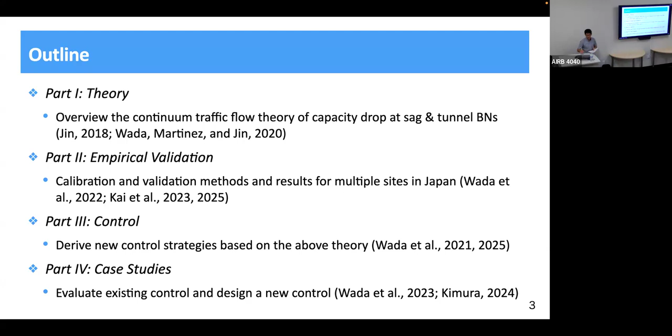Let me explain briefly why sag and tunnel. There are two main reasons. The first is that they are very common bottlenecks in Japan, because most intercity expressways in Japan pass through mountainous areas. About 80% of traffic congestion occurs at uphill sections and tunnel entrances.

The second reason is the long research tradition starting from the works of Professor Koshi's group. This includes key findings based on advanced observation, the development of sophisticated simulation, and many empirical results. Let me show some advanced observations.

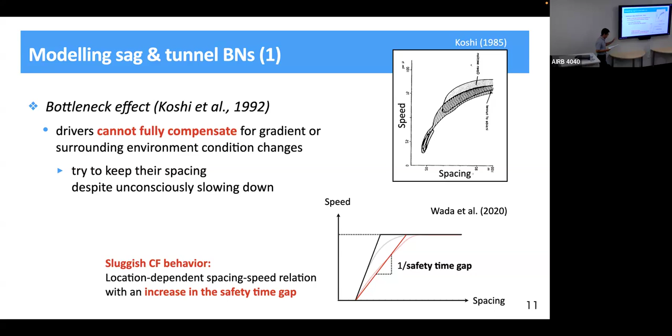What is CF again? Oh, this is sluggish car-following behavior - car following behavior. And this is the sluggish car-following behavior at sag and tunnel bottlenecks.

Let us look at the relation between the spatial change in traffic capacity and the safety time gap. Since the reciprocal of the safety time gap is the y-intercept of the flow-density plane, an increase in the safety time gap around the bottleneck section leads to a spatial reduction of traffic capacity, as shown in this upper figure.

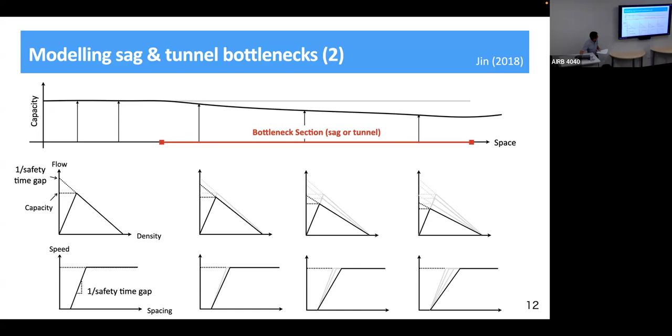This is a simple explanation of why the sag tunnel becomes a bottleneck - this is the bottleneck mechanism at sag tunnels.

Now let us illustrate the mechanism of capacity drop, showing how an increase in the safety time gap can also serve as a primary factor in capacity drop. That is, a temporal reduction in traffic capacity, not a spatial reduction.

However, in sag and tunnel sections, the trajectory becomes like this due to an increase in the safety time gap inside the bottleneck section. The headway here is the reciprocal of bottleneck capacity.

The important insight from this trajectory is that the increase in safety time gap describes not only the local capacity reduction explained in the last pages, but also delayed speed adaptation to the lead vehicle in the car-following situation, like this.

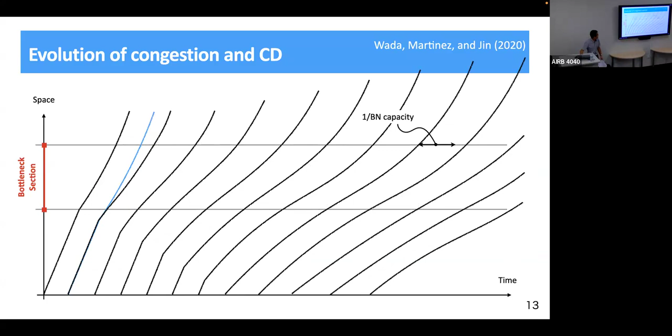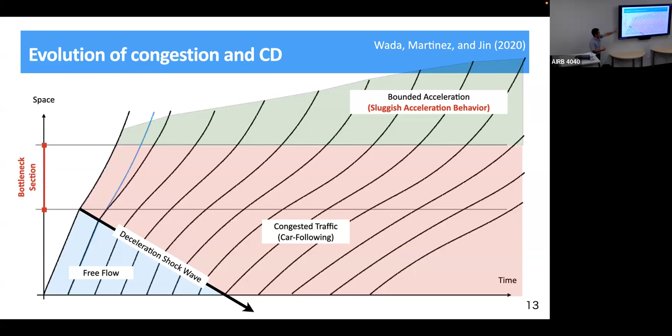This is a traffic state around the bottleneck: free flow, congested traffic, and bounded acceleration. Bounded acceleration state means that the driver cannot recognize the head of queue immediately, a kind of sluggish acceleration behavior. So bounded acceleration happens after people get out of the bottleneck. But for certain tunnel bottlenecks, there is no clear change in road condition, so people may not understand that they have passed the bottleneck. This corresponds to the bounded acceleration state.

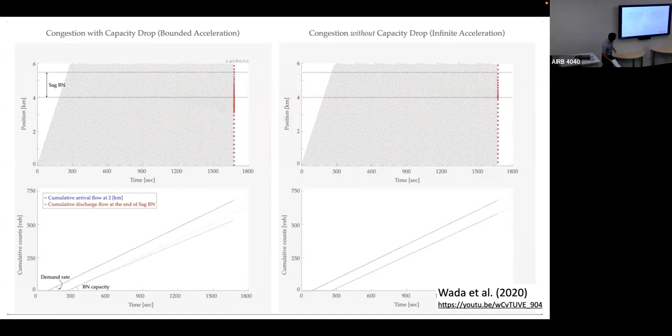So finally, in the last part of the theory, let us look at the shape of the speed recovery profile in capacity drop stationary state. In congestion, the flow upstream and downstream are all equal to the queue discharge flow rate, and this value is smaller than bottleneck capacity. This can be shown at this dashed line level, and the same flow rate can be represented in the speed-spacing plane by a dashed line from the origin like this, and this is the flow rate.

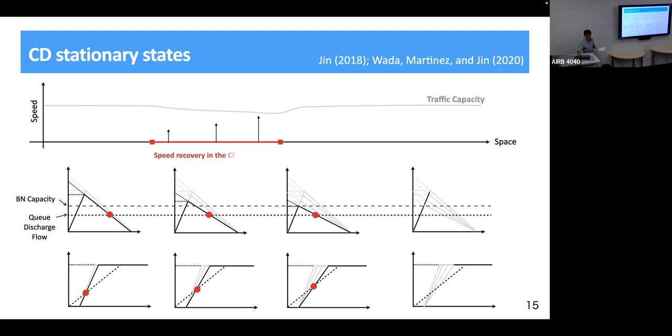By examining the traffic state at each location, represented by the intersection between this dashed line and the fundamental diagram, we can see the speed recovery inside the bottleneck section. Actually, speed increases inside the bottleneck section. On the other hand, downstream of the bottleneck, the transition from congested flow to free flow caused by bounded acceleration is observed, represented inside the fundamental diagram, finally reaching the free flow state.

This is a typical shape of the speed recovery profile observed in real traffic. The recovery in the bounded acceleration state is a driver's isolated acceleration. In this case, the higher the speed, the smaller the acceleration, meaning the profile shows a concave shape, approaching free flow speed asymptotically. On the other hand, speed recovery in the congested, car-following state often shows a clearly unnatural convex shape from the viewpoint of isolated bounded acceleration. So this may be the influence of the bottleneck appearing in the speed recovery profile.

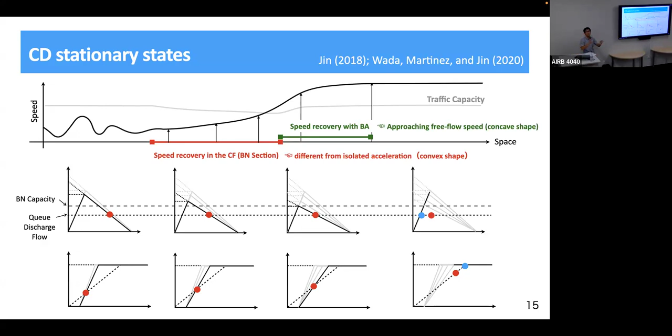Okay, this is a concave shape and this is a convex shape, there are two different states. In math terminology we can say concave down, concave up. I know some people use convex in this sense. What do you think? Concave, yeah.

The discussion on the previous page shows that the head of queue, the point where the state transitions from the congested state to the bounded acceleration state, is the inflection point of the speed recovery profile. But many people may think that the start of the speed recovery is at the head of queue, right? This comes from implicitly thinking of the bottleneck as a point. However, if we consider the bottleneck as a section, it is more natural to think of the inflection point as the head of queue. This is a very important insight from this theory.

We will see this in this graph. First, let us consider the case of a point bottleneck. In this case, as we can see from the speed recovery profile below, the start of speed recovery is indeed the head of queue. But such rapid speed recovery is not observed in usual sag and tunnel bottlenecks. A typical situation where such a point bottleneck can be seen is congestion caused by an accident or a traffic signal intersection.

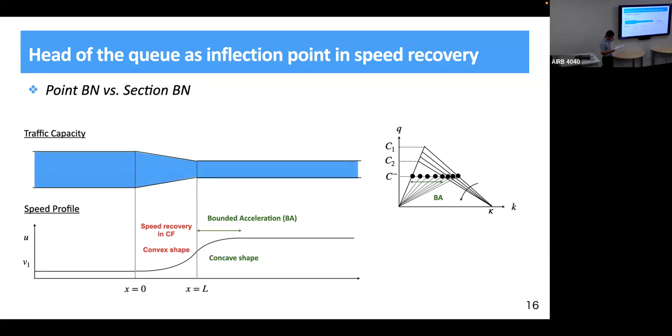This is the same graph as on the previous page. When a capacity drop occurs, the flow rate is less than the bottleneck capacity, so we get the car-following state, bounded acceleration state inside the fundamental diagram, and free flow state. It's natural to think of this inflection point as the head of the queue. This relationship between the bottleneck structure and the capacity of a stationary state becomes very important in empirical analysis and practical application.

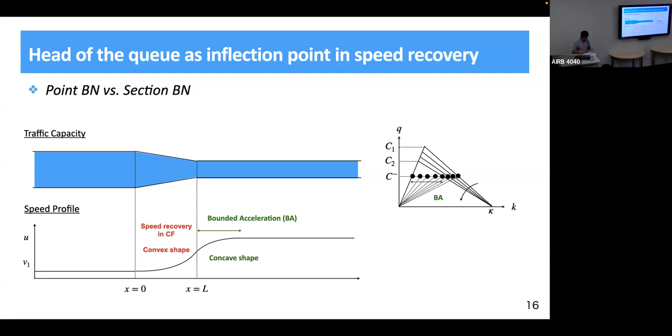This is a video I took of congestion caused by an accident. You see this is the speed. The accident vehicle was stopped on the shoulder, and there was no lane closure. These are the accident path, and now we have passed the bottleneck section, and it increases very rapidly. Within 200 meters, speed goes to 75.

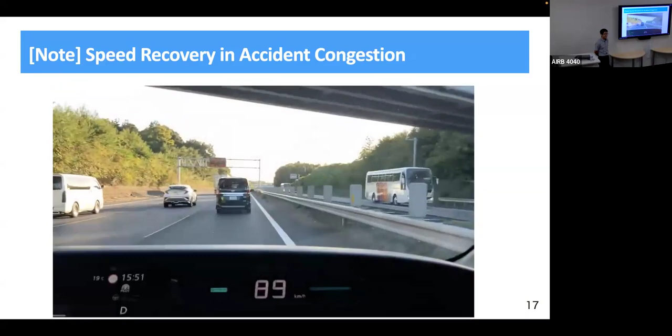What I noticed that was interesting is that the acceleration started when there was a light at the end, literally a light at the end of the tunnel. There were still vehicles over here, but you could see that there was hope in the traffic, and so everyone started.

This is a speed recovery profile I made myself, created from displayed speed and the roadside kilo post. This point is the accident point, and we have a small convex region here, maybe corresponding to the car-following speed recovery.

Basically the shape is convex, which means concave. It's interpreted naturally as isolated acceleration, bounded acceleration. So this means the bottleneck is almost a point in this case.

However, the start of speed recovery is indeed the head of the queue, but this is not the case for the section bottlenecks.

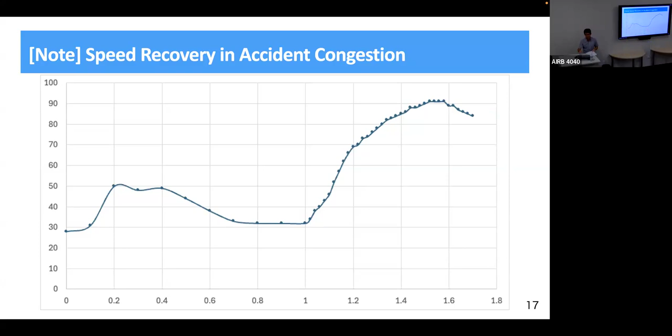The fundamental diagram represents a speed-spacing relation with increasing safety time gap in the bottleneck section, as I explained in the first part. The bounded acceleration model represents natural acceleration behavior in which acceleration becomes smaller as the speed approaches free flow speed.

Quick question - why is tau indexed by x, or a function of x? It means that depending on the subsection in the tunnel section, it increases.

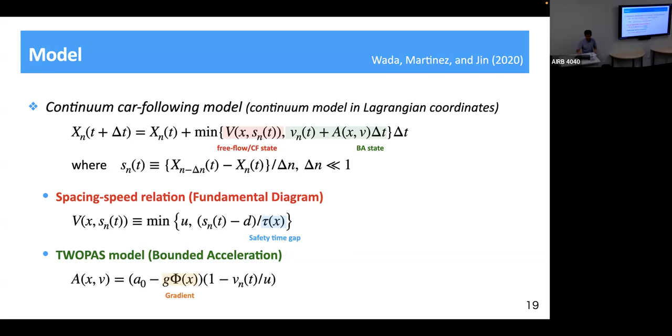The data validation method is as follows: loop detector data is used to measure total discharge flow rate during the congestion, and probe data is used to measure the average speed recovery profile in the capacity drop stationary state. In the validation, we first check qualitatively whether the convex and concave shape of the speed recovery profile actually correspond to the car-following state or bounded acceleration state predicted in theory.

For quantitative validation, we calibrate the model presented earlier and examine the validity of the result.

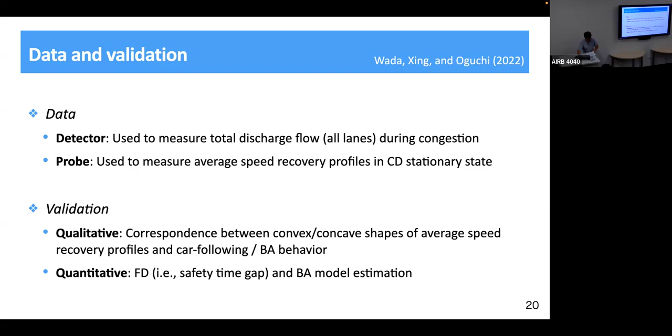We analyze the data using a slanted cumulative curve, adjusted by subtracting a constant slope so that change in flow rate becomes easier to see. From this figure, we can observe a drop in flow from 1,740 to 1,380. Maybe this is the demand level before traffic congestion, and this is the queue discharge flow rate.

From the downstream detector, we can observe the drop in flow from 1,570 to 1,380. This is maybe the bottleneck breakdown flow, and this is the queue discharge flow. From this figure, we can see the occurrence of capacity drop clearly.

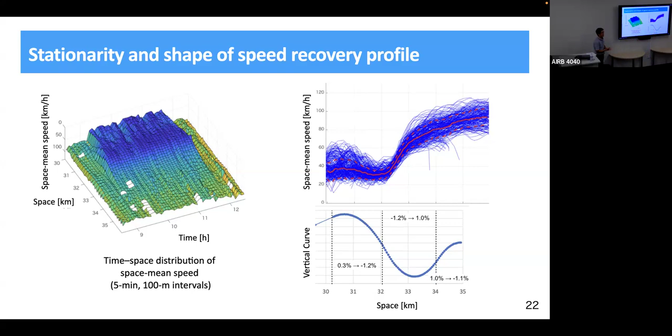And this figure shows, we want to confirm this state is actually the car-following situation, and this other state is actually bounded acceleration, from loop detector speed data.

This position's speed across different lanes is almost the same during congestion, which means this is a car-following state, because due to the constraint of the downstream, there is no room to make lane changes. No lane characteristics were observed.

On the other hand, at this position there is a speed difference even during congestion, which means the car-following or congested state is not dominant here — this may be the bounded acceleration state. Some lane characteristics, like the passing lane being more aggressive, are observed in this state.

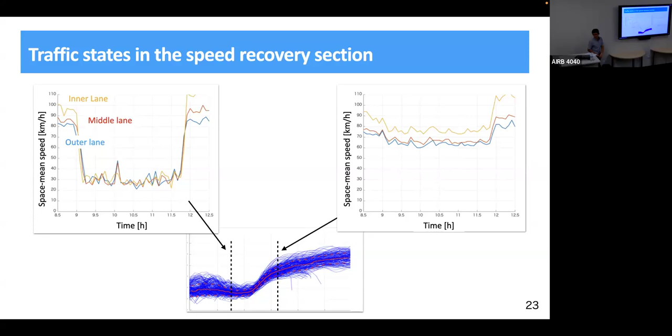Okay, so now we move on to the quantitative validation. In the model calibration, we define the bottleneck section based on the speed recovery profile. The starting point of speed recovery is set as the beginning of the bottleneck section.

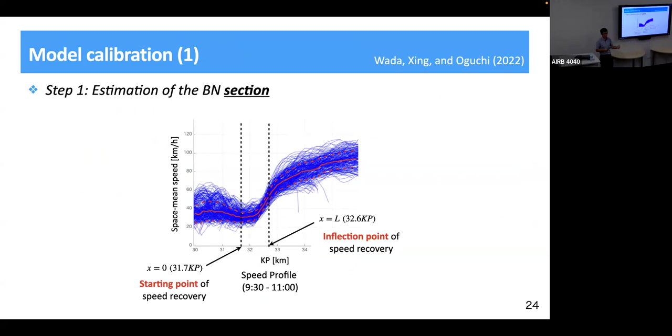We set the inflection point in the speed recovery as the downstream end of the bottleneck, that is the head of the queue. In step 2, we estimate the fundamental diagram in the bottleneck section, that is, estimating the safety time gap for a given free flow speed and jam density. From the loop detector, we observe the discharge flow rate during the transition.

From probe data, we can obtain the speed at each position. This speed can be represented on this plane by this dashed line, so we can see this is the current state at this position. Now, drawing the congested branch line of the fundamental diagram so that it passes through this point, we can estimate the y-intercept and the capacity.

This procedure applied to each location within the bottleneck section allows us to estimate the safety time gap and also the capacity of each position. This is step 2.

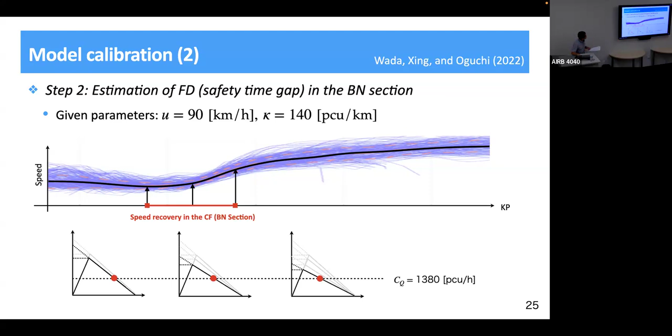In the final step 3, we estimate the parameter of the bounded acceleration, A0. At the head of the queue, the acceleration can be expressed on the left side here in terms of the rate of time gap and discharge flow rate Q, and other factors. We determine the parameter so that this acceleration matches the acceleration given by the bounded acceleration model on the right hand side.

So finally, I'll explain the overall adjustment. We can see from the procedure that once the bottleneck section is determined in step 1, the parameters in steps 2 and 3 are automatically set.

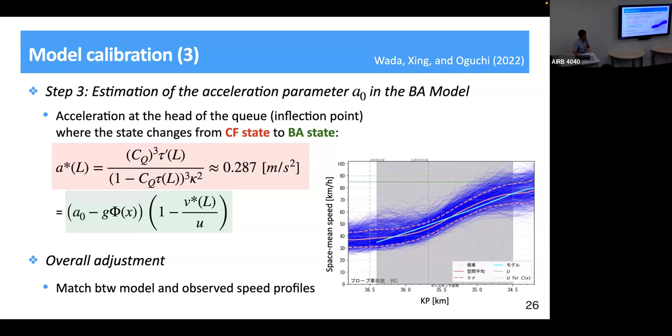From this, if we set the bottleneck section, this gray area, then we determine the model speed profile. And so we determine the parameter, we finally adjust the bottleneck section so that the model speed profile becomes close to the observed one. This is the calibration result.

The left figure compares the calibrated model with the observed average speed recovery profile. The match in the bottleneck section is almost obvious since the safety time gap is set accordingly. However, the reproduction of the downstream bounded acceleration state is also good.

The right figure shows the estimated capacity. From here to here, capacity gradually decreases. This capacity is valid because it is close to the breakdown flow rate at the beginning of congestion.

Even though only data from the capacity drop stationary state are used, the model can estimate the flow level just before flow breakdown occurs. We don't use any data before traffic congestion occurs, but we can reasonably estimate the capacity. So we can conclude that the proposed theory is quantitatively valid.

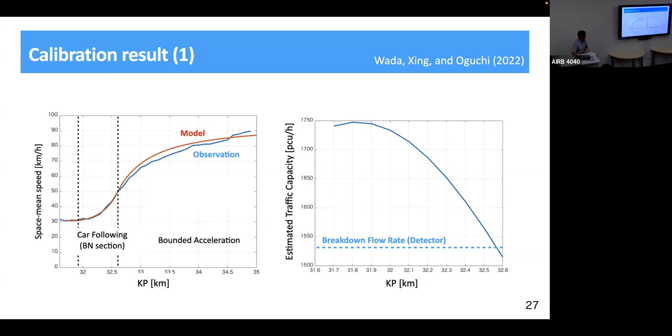This figure shows application of model calibration to other bottlenecks. In all cases, the model successfully reproduced the observed speed recovery profile, and this result demonstrates the robustness of the model in the theory.

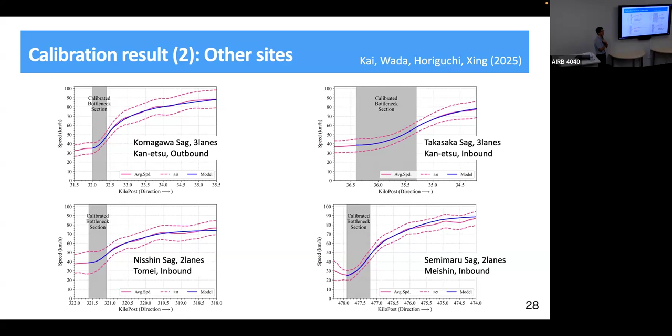That's still, I mean, 'cause you're showing in that other graph that it could be anywhere on the downslope or upslope. Even if you change the nature of where the two points are, it's not obvious that either of them will address the problem. So you're looking at it from a roadway design perspective. Yeah, I think Mike's point is coming out. Yeah, indeed, that's kind of unfortunate. Yeah, and there's no clear pattern. So there isn't any clear explanation why this happens. No, currently it's just empirical — it just empirically shows that it varies side to side. It's not your fault, the data just says it's not. But our theory is important to identify this, because for example, the first one is now kind of like the lowest point, and it's the end of the thing, but that is...

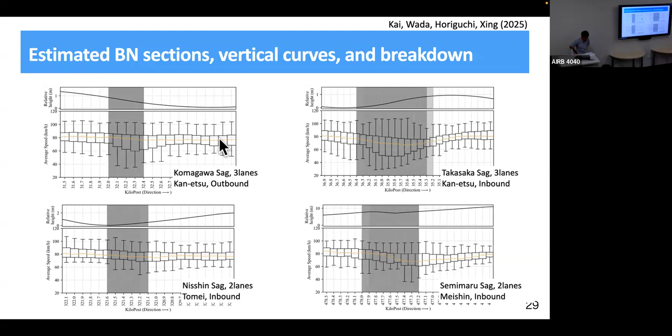Okay, let's move on to part 3.

Control measures for capacity can be broadly classified into two types: those that prevent congestion at bottlenecks, and those that improve the queue discharge flow during congestion. Examples of the former include ramp metering, variable speed limit, and automated vehicle technology. Martinez and Professor Jin in 2020, based on the theory we have so far, successfully derived the optimal variable speed limit zone.

We focus on this type of strategy. The latter aims to improve sluggish speed recovery behavior through countermeasures such as driver alerts via message signs, the moving light guide system which I will explain later, and also automated driving technology.

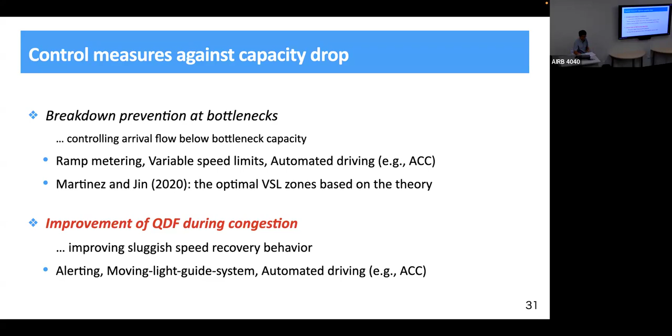Before going into the proposed control, let us briefly look at the impact of capacity drop mitigation. If the bottleneck capacity is maintained during congestion, like the dashed line, then delay is reduced like this. There are two effects here: a decrease in the queue and a shortened congestion duration.

A rough estimate with some simplification shows that if the queue discharge flow rate improves by 1%, and the demand-capacity ratio is 1.1, total delay is reduced by 20%, average delay reduced by 11%. These become 5% and 4% respectively if the demand-capacity ratio is 1.5. Anyway, this small improvement can bring very large benefits.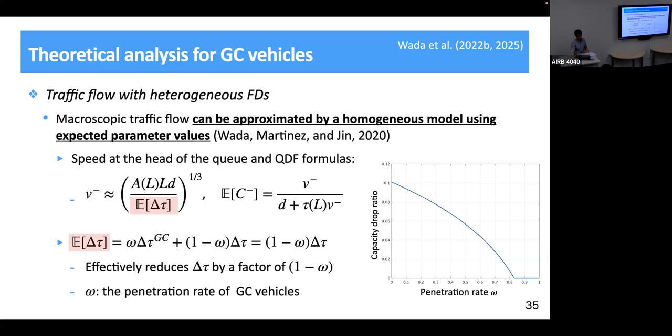The right-hand side figure shows the relation between penetration rate of the GC vehicle and the capacity drop ratio calculated by these formulas. What's GC? This is gradient compensation vehicles, no suffered increase in time gap.

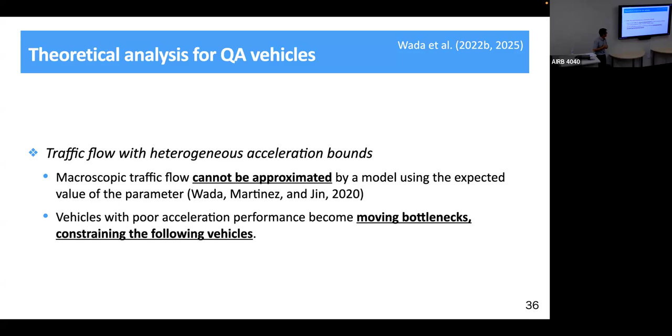On the other hand, the situation where quick acceleration vehicles, QA vehicles, are mixed with normal vehicles can be regarded as traffic flow with heterogeneous acceleration bound. As shown also in what I told, such a situation cannot be approximated by the model using expected value of the parameter. This is because vehicles with poor acceleration performance become moving bottlenecks, constraining the following vehicle.

So in the numerical experiment, we use the parameter that reproduces the congestion at the Kobotoke tunnel in Japan. The capacity drop ratio in this case is 10%. This is the bottleneck capacity and the queue discharge flow rate, and the capacity drop ratio is 10%. The experiment was conducted with penetration rate from 0% to 100% at 10% intervals for each strategy, and for each penetration rate, we conducted 10 random simulations.

The specific setting of rate of change of safety time gap and the bounded acceleration parameter for normal vehicle and the gradient compensation vehicle: change of safety time gap is 0. And for the quick acceleration vehicle, the bounded acceleration parameter is very high.

This is the simulation result showing the penetration rate of each vehicle and the capacity drop. We can see that the results are highly contrasting. Specifically, for the gradient compensation vehicle, the increase in penetration rate and the improvement are almost proportional. On the other hand, for the QA vehicle, a penetration rate of 90% only leads to 1.3% improvement. So we can say that the improvement of the car following behavior in the bottleneck section is much more important than the bounded acceleration behavior when leaving the bottleneck for reducing the capacity drop.

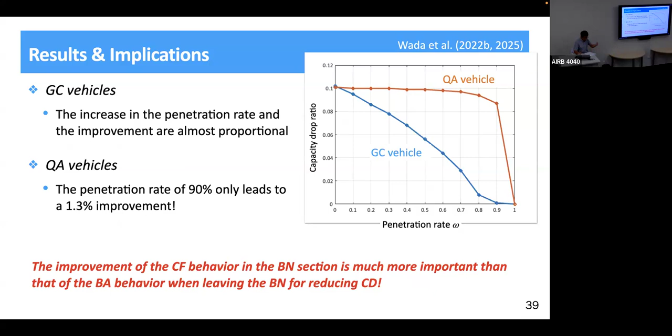Okay, this is the last part. Here I present a practical case study where the theoretical consideration so far has been applied in real-life operation.

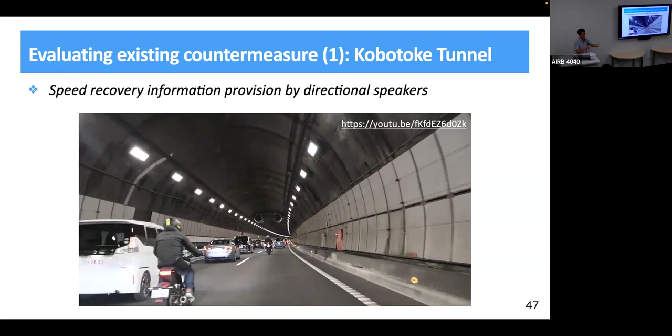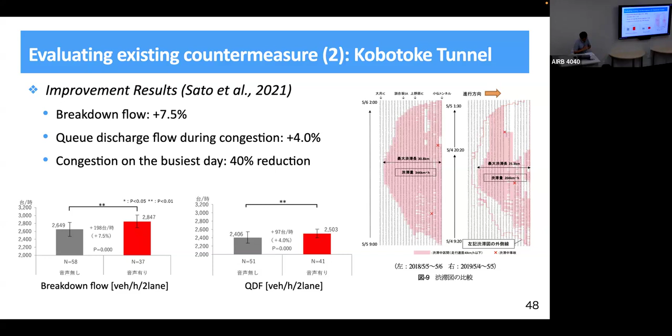Japanese engineers tried many different strategies to improve the behavior. According to Sato, a 7.5% improvement was observed in breakdown flow, and the queue discharge flow rate improved by 4%. They also report that when comparing congestion events with similar demand patterns, total congestion was reduced by about 40%.

In what we showed in 2023, we analyzed the factors behind the improvement based on theory. The results show that the improvement in breakdown flow and queue discharge flow can both be explained by reduction in the safety time gap. I'm showing a figure here, sorry, it's not very easy to see.

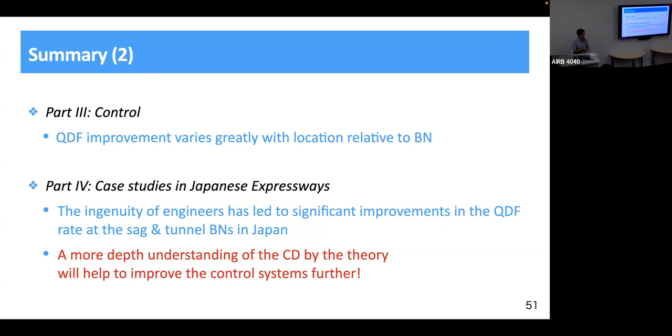Thank you very much for the fascinating talk, from theory to empirics to practice to control. And they actually talk about the panel. That was very interesting.

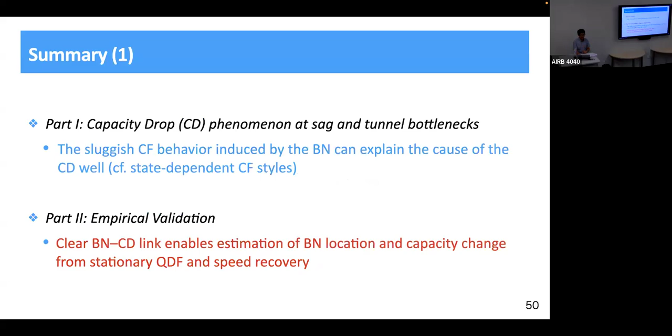You know, when I devised the theory, maybe before Ken was visiting, I derived this crazy equation, third order, concave up, concave down, and I didn't know if this was correct. And he showed me there's actually been observation back in the 1980s on the speed profile. So now I feel comfortable presenting my crazy equations. That was an incredible journey for me as well. I was very confident that my crazy equation had to be okay. So that can take it to the next level, as you can see, so many more slides, and put it into practice.

Yes, and especially the conclusion that there are a lot of engineers with great ideas, great intuitions to improve things, and it seems that with a good understanding of the theory of the underlying mechanism, we might be of further help. I look forward to more of your results.

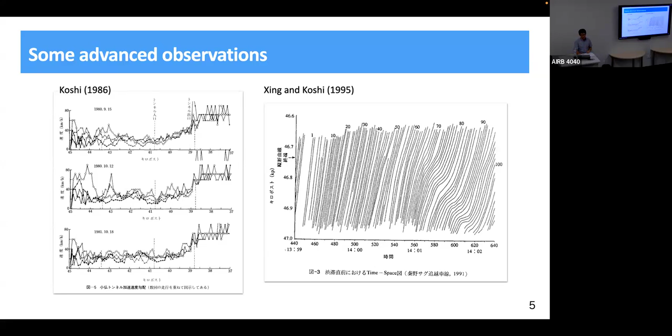I guess I should say one of the main reasons I got into transportation engineering is because of a tunnel sag combination issue in my hometown that I still hate to this day. So I'm wondering, you didn't talk too much about tunnels, but you showed us in terms of the sag that it's kind of difficult to pinpoint a priori where the inflection points are going to be. What about in tunnels? Is it the end of the tunnel always? Is it sometimes downstream at the end of the tunnel? What do we typically see with tunnels?

Typically the tunnel section also has a sag or slope section, so actually we cannot distinguish between sag condition and tunnel condition. In Kobotoke tunnel also, maybe due to the steep grade.

I didn't know that. I always thought the major issue was like, you kind of go down before you get to the tunnel, then you start going up and you get to the tunnel, but it's not clear to the driver that they're actually driving uphill. I think that causes some mental cognitive issues in terms of realizing you do need to accelerate, even to keep the space that you want to keep at a given speed. Anyway, I'm glad to have the picture more clear in my head as to what the problem is.

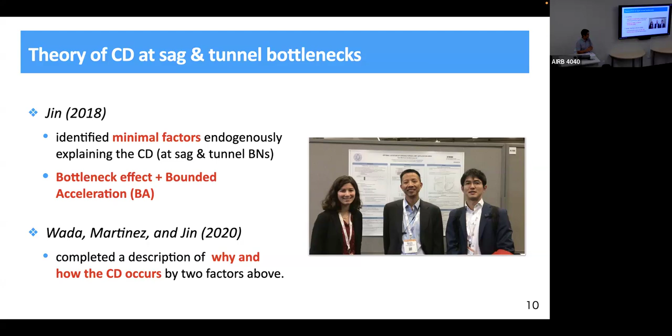We don't trust the car. And would the pace car - I'm thinking of them as a pace car here - would those be an automated vehicle, or would those be drivers that are trained to speed up and so on? I think a pace car can work if designed appropriately.

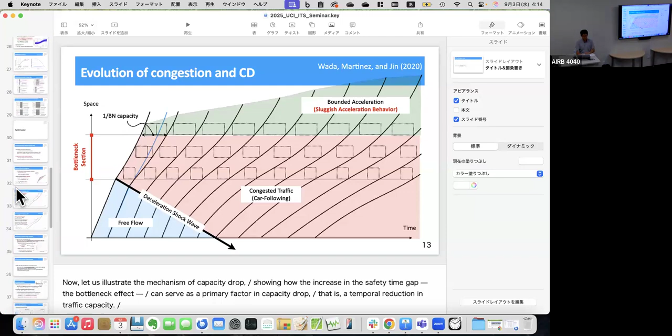Right, which people are kind of already talking about. But currently, people working on automated cars focus more on safety and comfort level, not the efficiency level. Traffic efficiency is kind of more secondary at this moment, but in the future there's a lot of possibility.

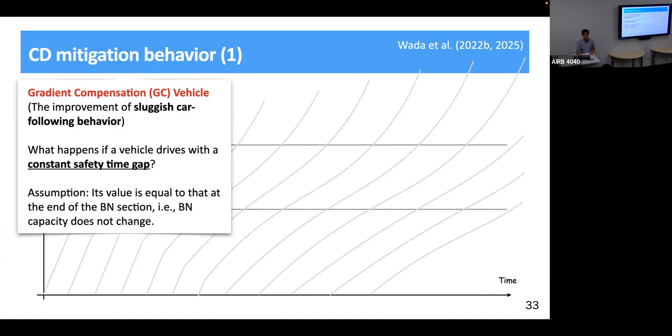Indeed, thank you. I have a quick question about countermeasures - you mentioned you use light as a countermeasure for sag. I'm wondering, in terms of tunnels, do you have some kind of countermeasure to address the safety time gap?

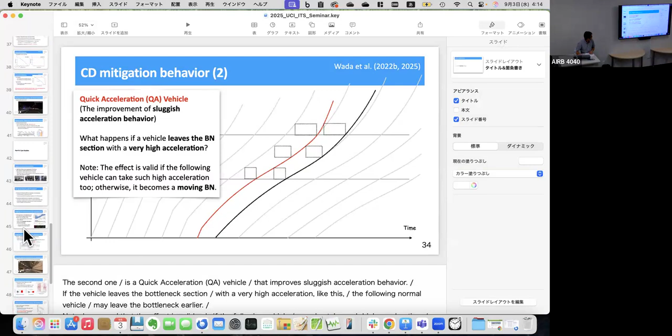This light system is also introduced in the tunnel. And in the tunnel there is a speaker for emergency situations, telling drivers they should speed up. So by using such an emergency speaker, we can directly inform the intention.

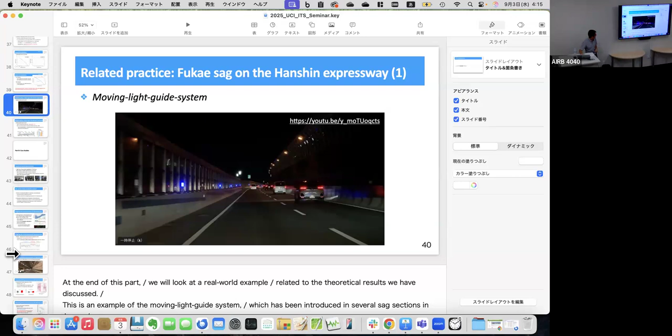This control system implicitly requires people to follow it, but many people cannot understand what it is. Compared to this, the tunnel announcement is more clear to people.

To be honest, I was really impressed, because I don't know how many people would be listening, especially nowadays with podcasts and the penetration rate of automatic ACC users. This kind of strategy should become less effective, but just by using this, you saw a 40% decrease. That's really impressive.

So this speaker is just asking them to speed up. But you mentioned there are two factors: one is the safety time gap, the other is bounded acceleration. So in terms of tunnels, do we have some countermeasures to maintain the safety time gap?

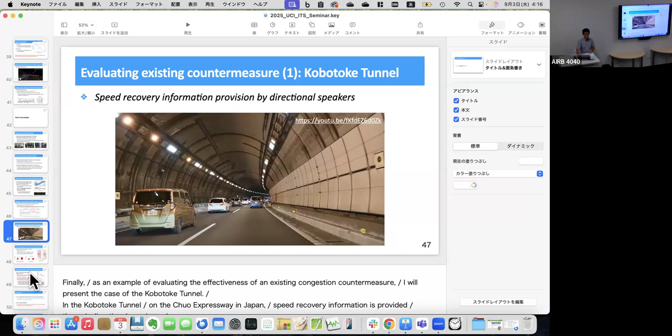To be small - in practice there is no distinction between two strategies, but there are two announcement areas. Maybe this one is for improving, shortening the safety time gap, and this part corresponds to more rapid acceleration and quick acceleration behavior.

In this part, once you have passed the head of the congestion, an announcement is made: please leave the queue quickly. This announcement is made in this part. But in my view, this is not that effective.

Does the slope of the roadway, or the kind of severity of the sag, have a direct relationship with the capacity drop - the size of the capacity drop? Still, I don't know a clear relationship. I'm just going back to my roadway design perspective.

We can measure the daily congestion cost of one roadway design versus another - that can help us make that judgment. But some experts say a steep sag does not necessarily mean severe congestion, because with a more gentle slope we cannot even recognize it as a sag.

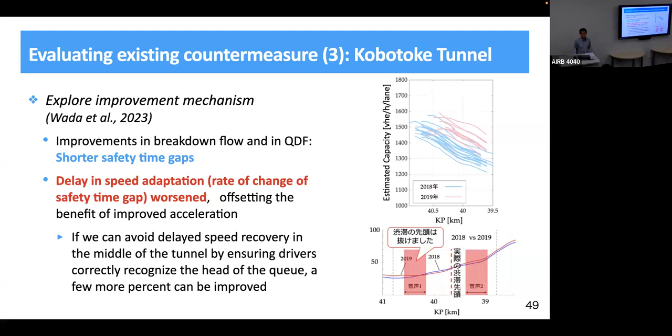And I can share the data. So you have - I'm just wondering, moved to online - how did you come up with these countermeasures? I came up with this idea from accident congestion.

During accident congestion, a very rapid speed recovery is observed, as I showed in the video. So from that I came up with a countdown. Countdown - wow, that seems to be from... of course, other measures like the moving light guidance and the broadcast are from engineers, a lot of engineering ingenuity.

I don't know if they have theory behind it, but many engineers do come up with ways, basically trying to push people through the bottleneck. You think of pushing people into the subway car, something similar - it reminds me of that, 'be faster.' That makes sense. If there's a bottleneck here, let's just try to push people through the bottleneck, right?

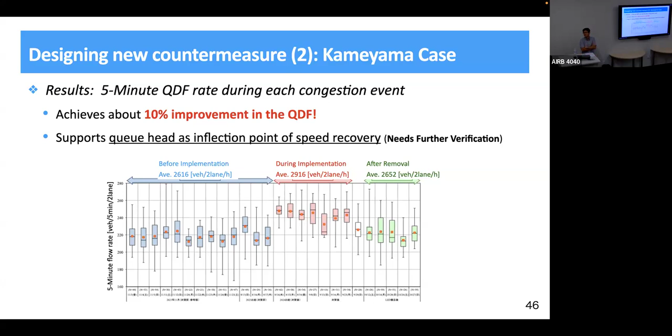Different ways - those are not designed, but this countdown, among all of these, seems to be most effective, at least tentatively, showing 10%. Others report 4%. Yeah, and things like that.

That's really cool. Basically, if you count down and get closer to the real bottleneck, people will become a little bit more aggressive, because in theory, when people get closer to the bottleneck, they tend to have longer and longer time gaps, more cautious in a sense. But if you count down, maybe it reverses the effect, letting people become more aggressive, so their time gap does not reduce, which then does not lead to the capacity drop and all these effects.

Wouldn't it be almost like when you were driving at 30, then 28, 29, and there were still vehicles on the side? Anything that told you there was something to worry about was still there, but people saw that a few meters ahead it was open, so they changed their behavior, even though there was still the same reason to be careful. Do you remember driving and going 28, 29, 30, 31? It started speeding up, but there were still vehicles on the side, and ahead too. Yeah, but people were looking.

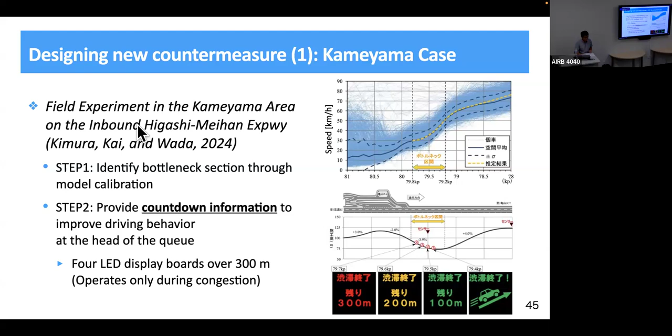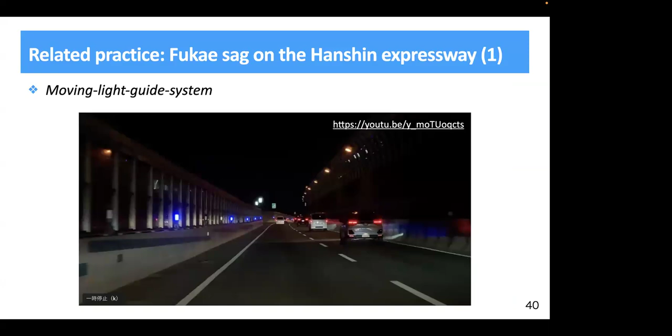Which page are you specifically referring to? Usually with respect to countermeasures. Yeah, so I want to know, given the input demand levels of the scenario, how the countermeasures work depending on the size of the demand. Oh, okay, so the question is whether the countermeasure's effectiveness depends on the demand level. He wrote the question in the chat, yeah. Okay, so I think demand level is...

The effectiveness of the countermeasure does not depend on the demand level, because once the congestion breakdown occurs and reaches the first jam state, there is no effect from the demand level in terms of improving how much it improves the discharge flow rate - that's not dependent on demand. Of course, in terms of total delay, as you mentioned, how much the demand level helps improve the delay does depend on demand level. Does that make sense? So basically, think of the arrival curve and departure curve - the countermeasure tries to get a larger capacity for the departure curve. This part does not depend on demand level, but the total queue length and the delay depend on the demand level. Does that make sense? Yeah, thank you so much.

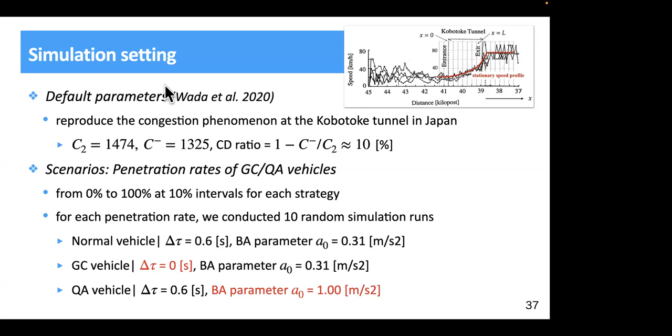I think it's excellent that you have some empirical data to validate all this theory, and I really like the two strategies. The first one reminds me of some simulation I ran, I think while you were visiting, where I was also considering different heterogeneity of vehicles, with different time gaps but also jam spacing. I also concluded that the best way would be to eliminate this increased gap with autonomous vehicles, but I don't know how realistic this is - for new cars to know, okay, now I'm in a sag, and even if the humans around me are behaving differently, I should keep my constant gap.

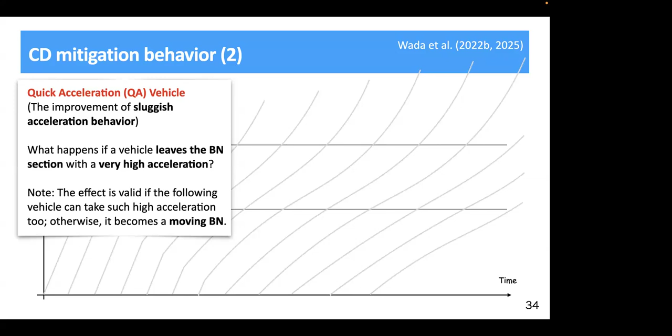But yeah, maybe we can discuss over email or online one day. Thank you, it was great to hear you and see you.

Thank you. So regarding the realisticity of gradient compensation for automated vehicles, I think with vertical curve information inside the car, the vehicle can adjust its speed in a feed-forward manner, not a feedback manner. Then they can compensate for the gradient change smoothly, I think.